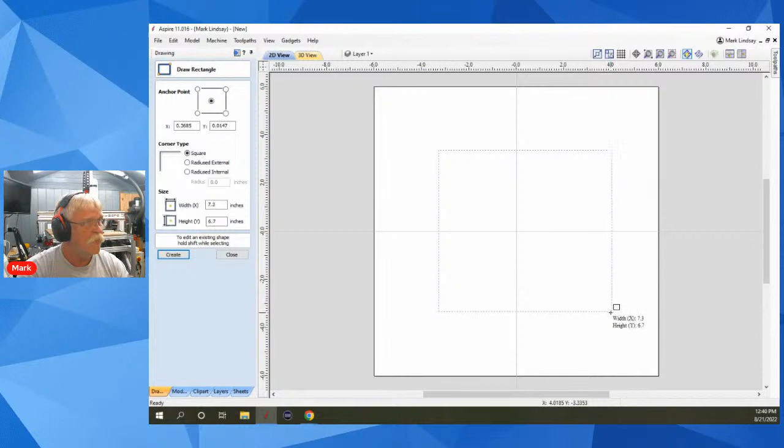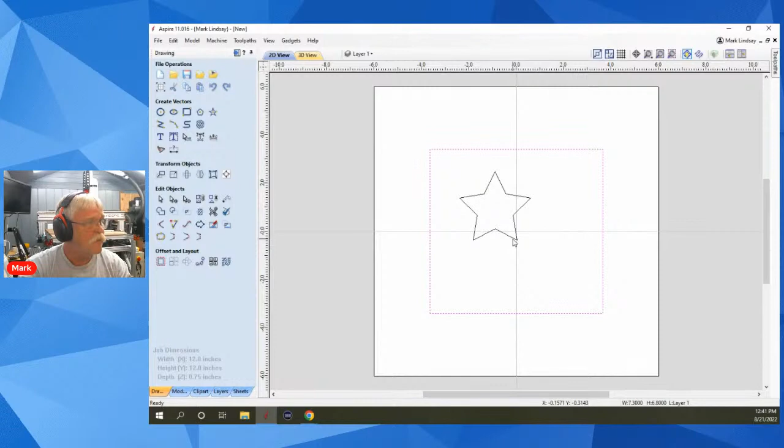Let me go over here to Aspire again, and we'll put some geometry out here. Let's say here is my pocket, and let's go with a star here. We'll just go like so, close it, and I'll select my pocket, tap F9 to put it in the center, select my star, tap F9 to put it in the center, and I'm going to pocket this out.

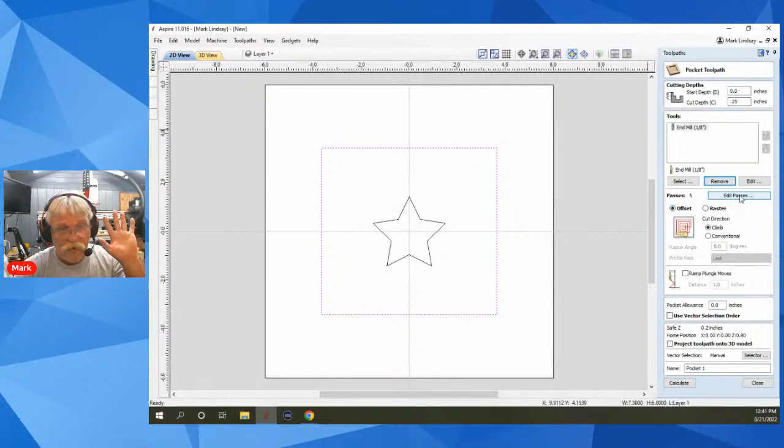So we'll do a pocket real quick. My cut depth I'm going to make a quarter of an inch deep, and I'll use an eighth inch end mill. So let's remove that quarter inch end mill, and just for the sake of brevity here, I'm going to bring this down to do it in one pass. I would not do that in the real world.

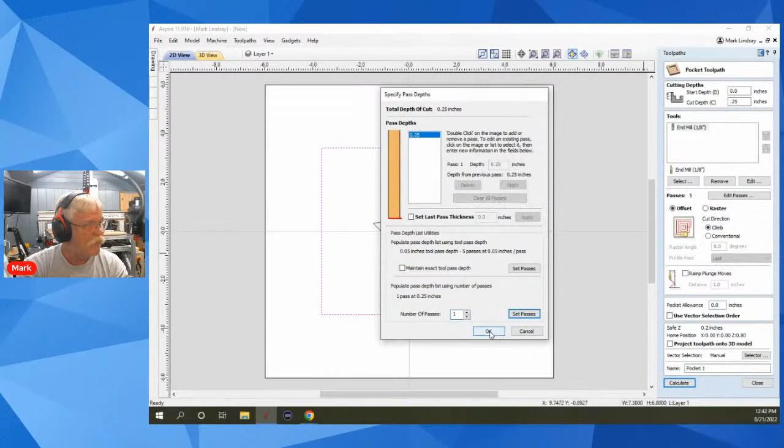Oh dummy, one pass, set passes. There we go. Okay, yes, and I know I wouldn't do that normally. Calculate.

Okay, now so we'll preview that, let it run. And I now have my quarter inch deep pocket.

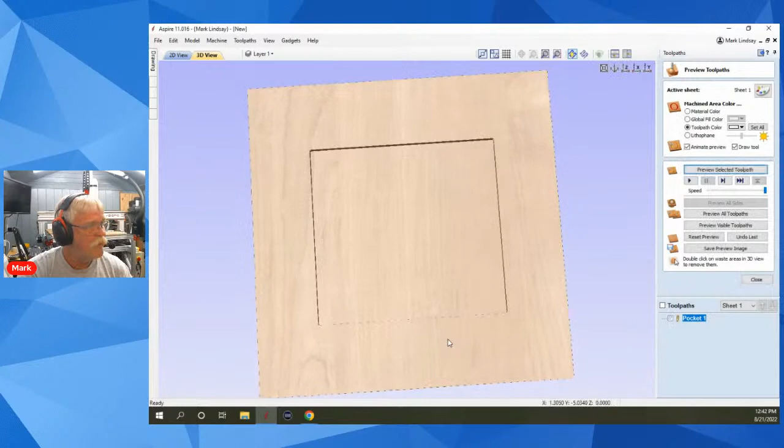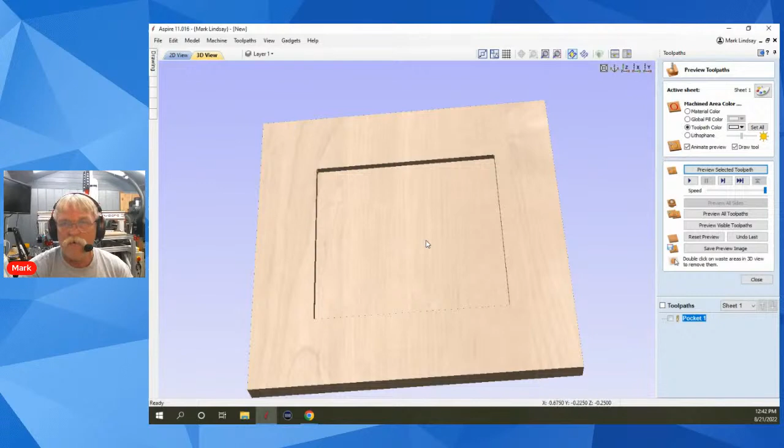Okay, now if you look right down here, you'll see some readouts when I have the cursor up here in the pocket that I just cut. You'll see it says the Z is negative 0.25. That's the surface I want to start carving that design in, so that's going to be my start depth for the next design.

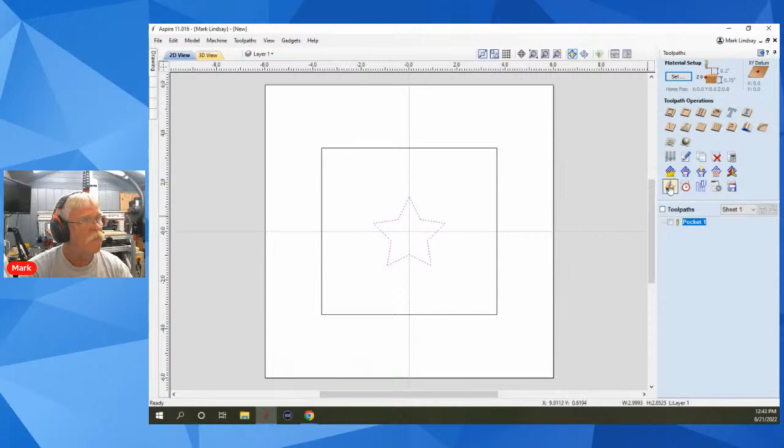So let's say I want to do that star. We'll close this, go back over here, and I'm going to do this a little bit differently. I'm going to select my star, do a profile toolpath, and my start depth is going to be 0.25. I want to cut a sixteenth of an inch deep.

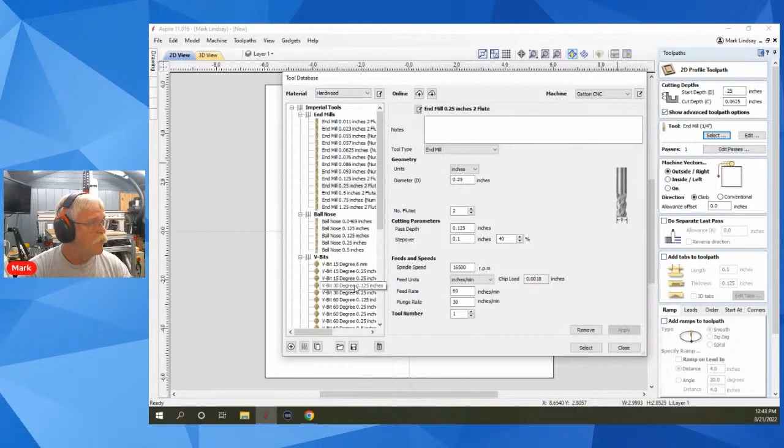I don't remember right off the top of my head what a sixteenth of an inch is, so I'll just type 1/16, then tap the equals button and let the calculator tell me the decimal equivalent. I'm going to select a 60-degree V-bit.

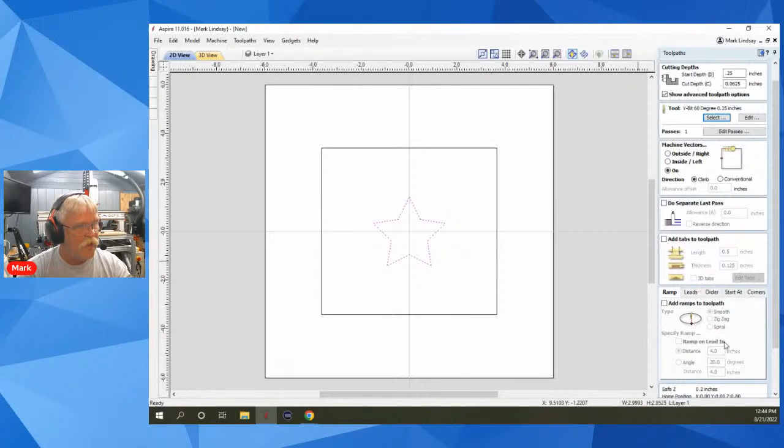And I'm going to carve that on the vector, so it's going to use that 60-degree V-bit to carve that design right there. That's all I'm going to do, I'm not going to do anything else. We'll just calculate that, and now what's going to happen is it's going to start that cut at the depth that I started from.

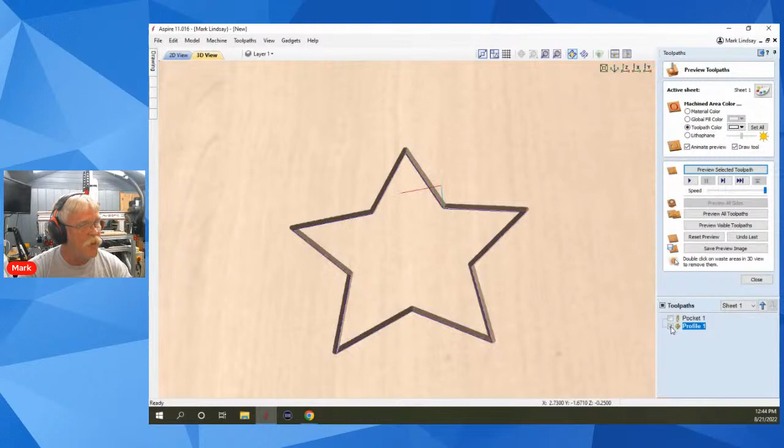So we'll preview it, and there it is. If we put a check mark here, so it's illustrating the tool path, and I turn it on the side here. Looking at this tool path, remember red is a rapid move, that's where the bit is up above the surface of the material moving over to the start point where it's going to plunge in and do the cut.

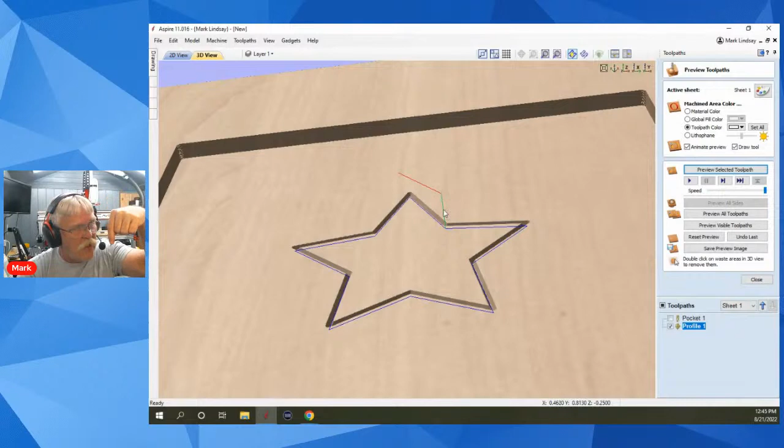This bluish-greenish vertical line right here, that's the plunge move. It's going to plunge down into the surface of that pocket, then start cutting. The dark blue is the cut itself, and you can see there is no cut above the level of this pocket.

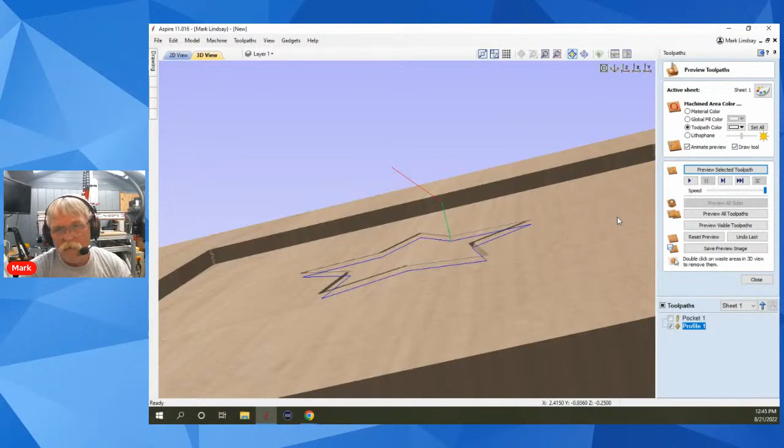So if you carve a pocket, come back out here again and I'll turn off that illustration. If you carve a pocket, put your cursor in that pocket after the preview, look at your readouts right down here, right below my cursor, and see where your Z is.

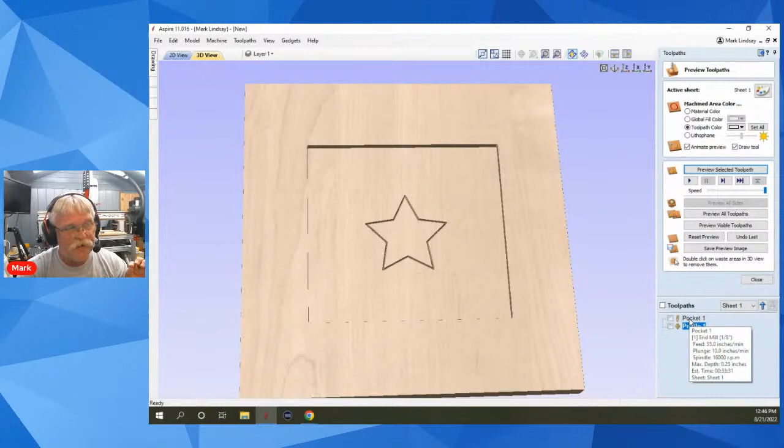Conversely, what you can do, if you have a couple of different levels out here, you can come over and hover your cursor over that pocket. If you look down, the third line from the bottom in that little bubble that pops up tells you what the maximum depth of that pocket is. It'll disappear after a minute, put it back over there, you can see it says max depth 0.25 inches.

So that's where you would set, close this, that's where you would set, come on, open up, your start depth on your next toolpath to cut out that design. So I hope that makes sense. That way you're not cutting air before it works its way down.

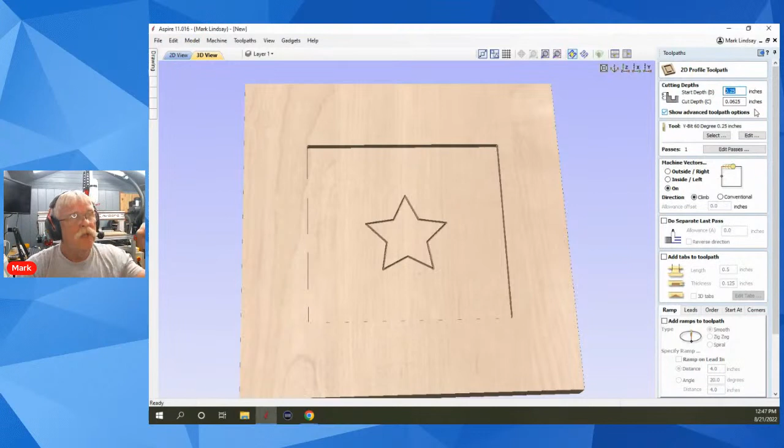Now one more thing here to talk about. When you set your start depth, that's where that cut is going to start. You want to set the cut depth to how deep you want it to cut in. In other words, what I'm getting at is it's going to start at a quarter of an inch down below the top surface of the material, and it's going to carve to that depth.

So it doesn't subtract your start depth. Now, you may know you have 3/4 inch material, and you want that to cut a 1/2 inch deep. Well, if you start at 1/4 inch down and you cut a 1/2 inch deep, it's going to cut all the way through, because 1/4, your start depth, and a 1/2 inch, that's your material thickness.

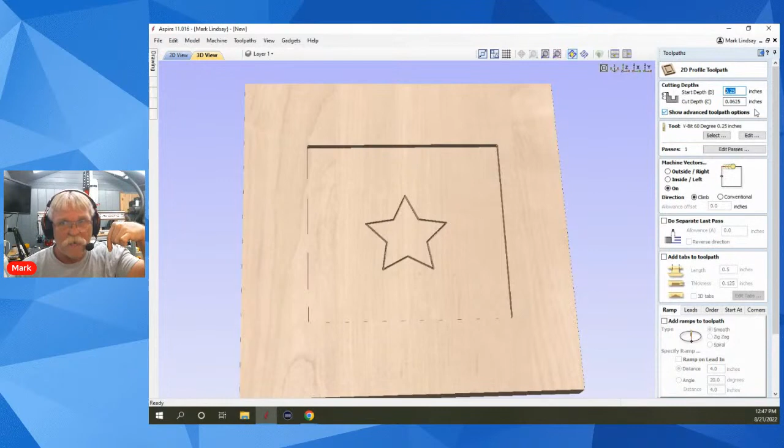So you have to remember, if you want that star to be a 1/2 inch down from the top, you take a 1/4 inch start depth and a 1/4 inch cut depth. These two added up will be the total depth of cut. And if it's the same as your material thickness, it's going to cut all the way through the material. So do know that, a lot of people get in trouble that way.

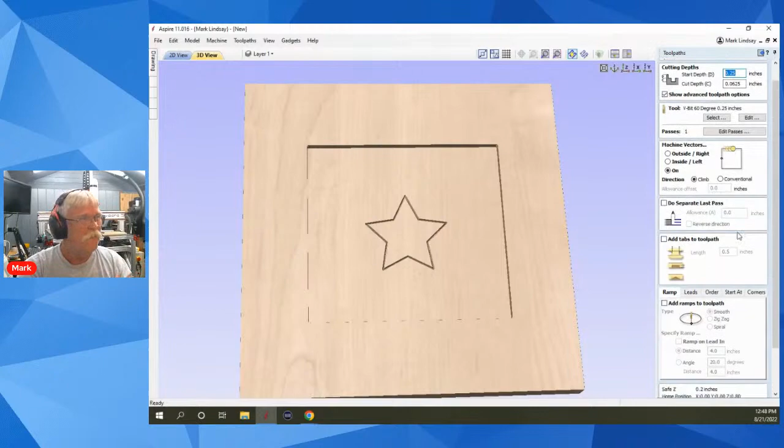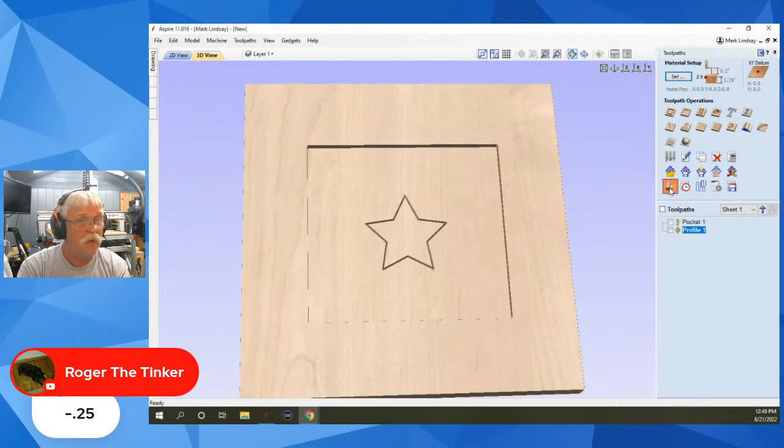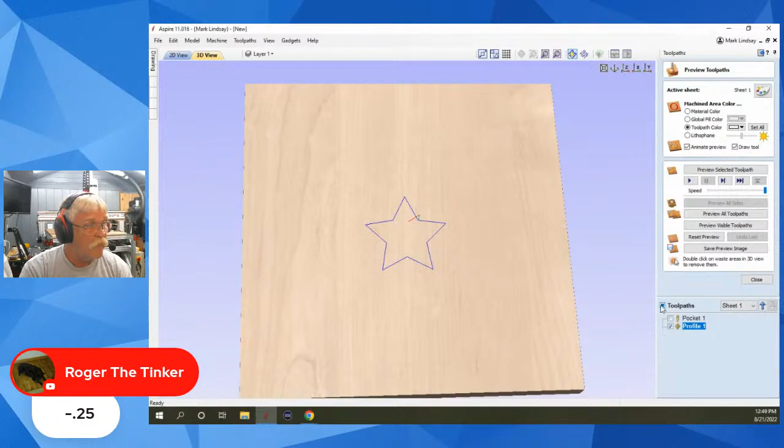Roger the Tinker says negative 0.25. You can do negative 0.12, negative 0.25, but let me show you what happens here. Let me go back into my preview, and we'll reset the preview. Close, and I'll go in here, and I'll put in negative 0.25 and recalculate the toolpath. Calculate it. All right, now I'll turn off that toolpath so we're not looking at it.

I'll do my pocket real quick here. It was too late to do the undo last, so I had to reset the whole thing. Thankfully it's not a big deal. Now I'm going to turn on the profile and look, and there's no difference. There's zero difference, so I can come down here, preview, and it's exactly the same.

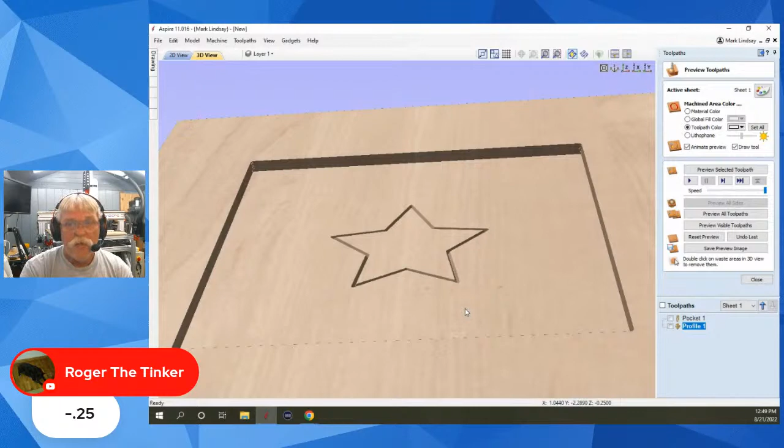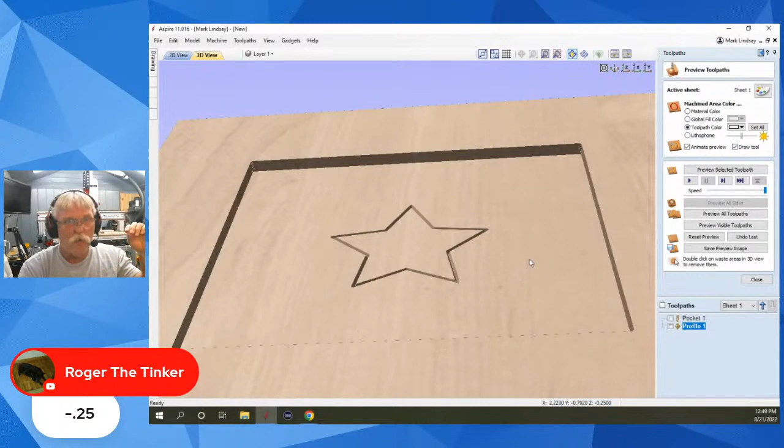The software knows that your start depth is going to be below the surface. So you can put in negative 0.25, but you don't have to, it will do it. There's no difference in this situation. Not always, not every toolpath, but on this profile toolpath, it knows you mean down here. There's no difference. So you can put that in if you like, it makes no difference, it doesn't hurt anything no matter which way you go.